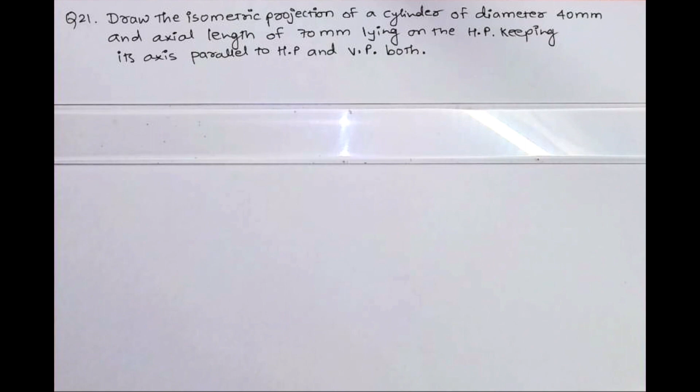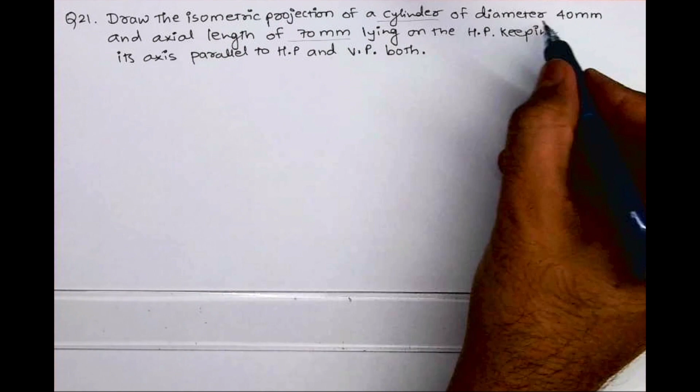Welcome to Technical Drawing. Today we'll see how to draw isometric projection of a cylinder of diameter 40 mm and axial length of 70 mm lying on HP, keeping its axis parallel to HP and VP both. Now they are saying it's a cylinder, right? Diameter 40, length 70, lying on HP, keeping its axis parallel to HP and VP both.

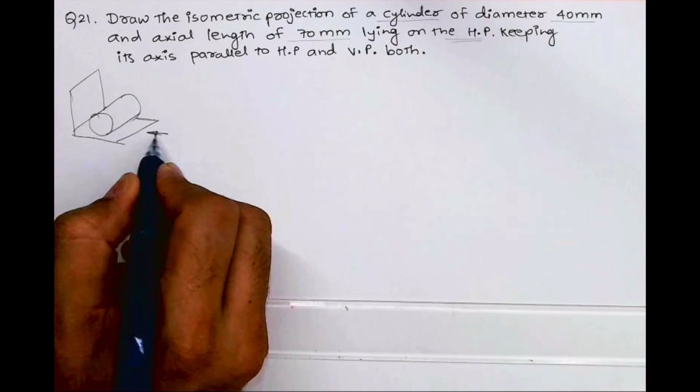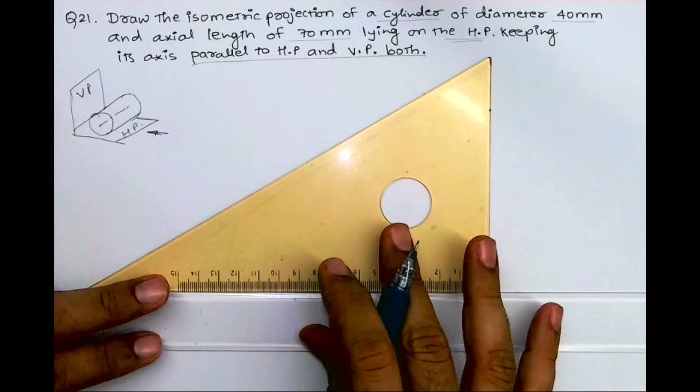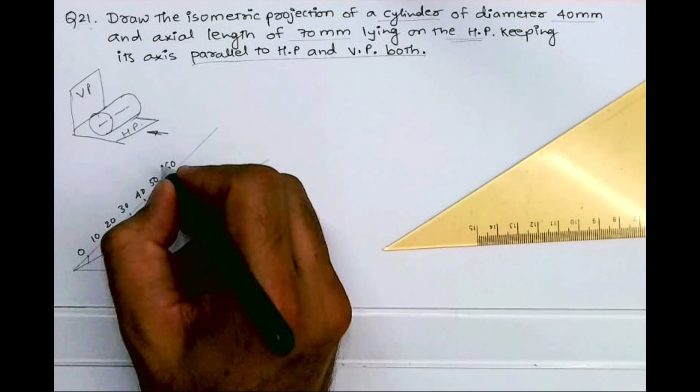So that means it is lying like this. When you see from the front, you'll see a rectangle, and in side view you will see a circle. The axis will be parallel to HP and VP, so it will be this way. So in this case, first we will draw the scale, which is 45/30. All of you know how to draw it. So we are done with the scale.

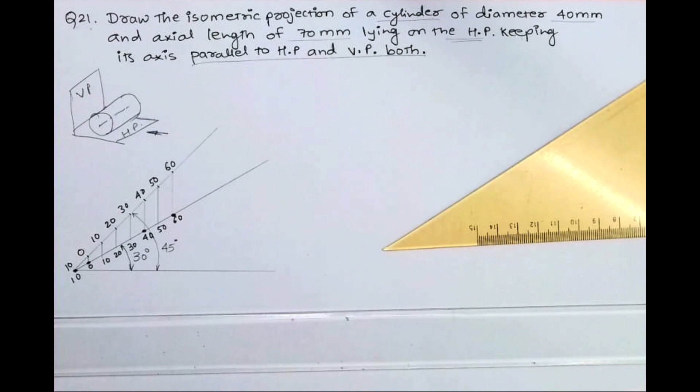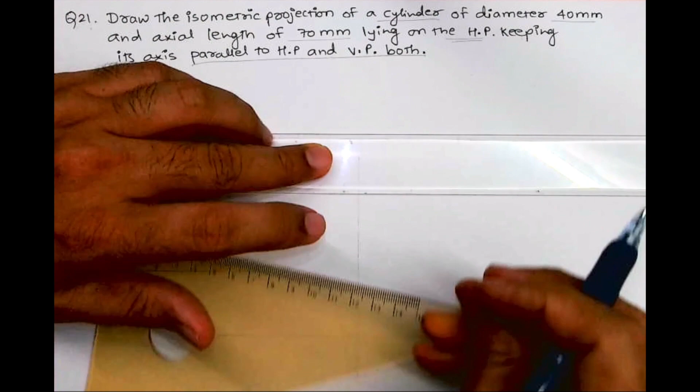Now we need to mark 40 and 70. For 70 we'll take 60 and 10 over here, so it will be 70, and for 40 we'll take 40 to 0. Now it's a circular part, so no need to draw a helping figure. If you want to draw, you can draw a circle of diameter 40. If you don't want to draw, you can start directly. See, there is a difference between circle and square. In square, at times you need to draw a helping figure, but in circle it is not required.

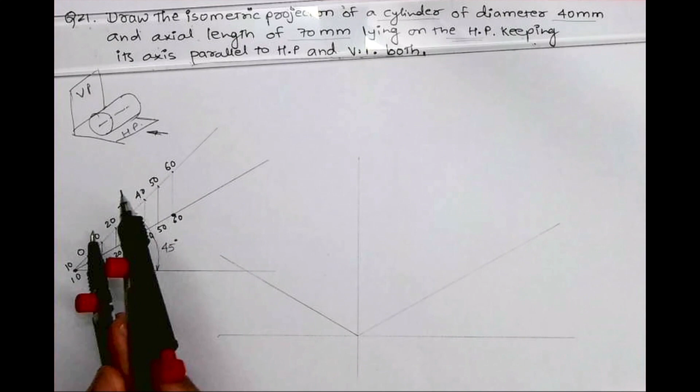So what I'm doing, I'm drawing the box. I'm taking 40 and I have marked it on both the sides. Then I will draw a rhombus. All of you know how to draw a circle in isometric by using the 4 center method, so we are doing that. Now I'll take all these points behind. How much do you have to go behind? We have to go behind by 70.

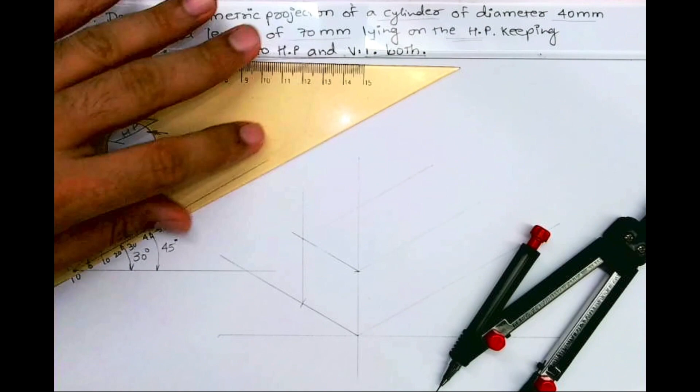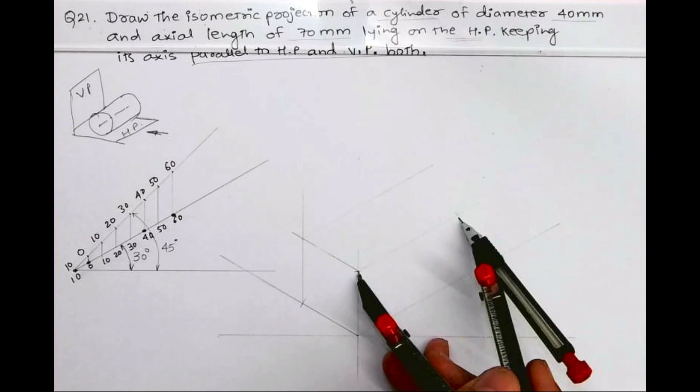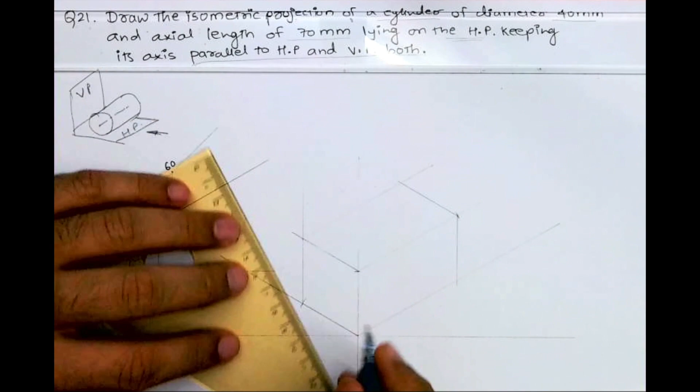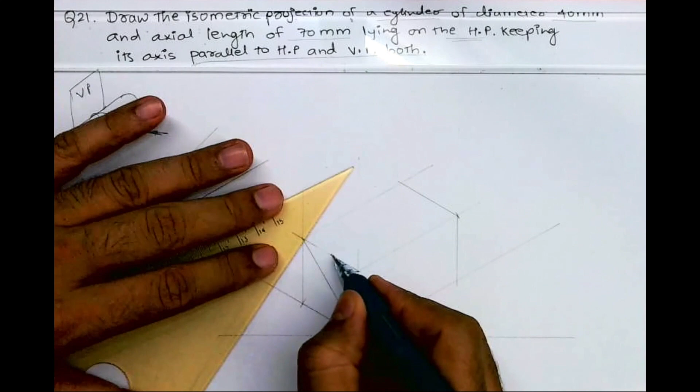So take 70 and you will cut. Then you draw a vertical line and you draw a line from here. Then you draw the longest diagonal. We'll take half of it, or you can mark 20 from the scale and mark it on it. So first you draw the longest diagonal and then you mark the midpoint. Then you join to the opposite corner like this. See, I'm taking 20 and I'm showing you it is the same.

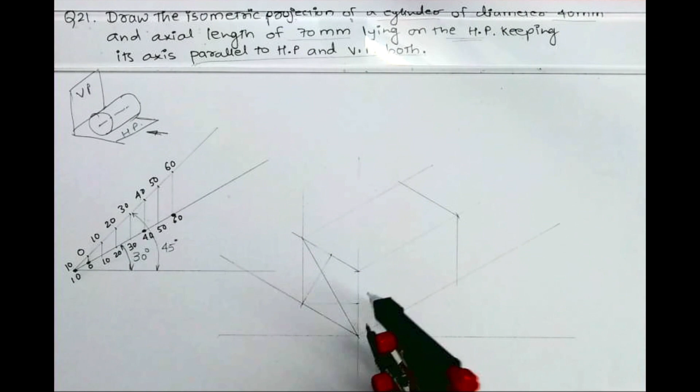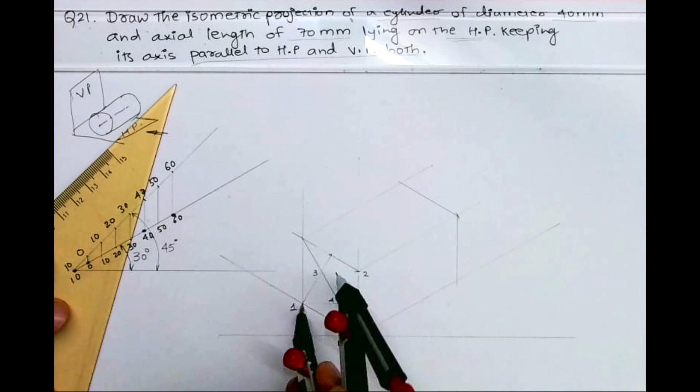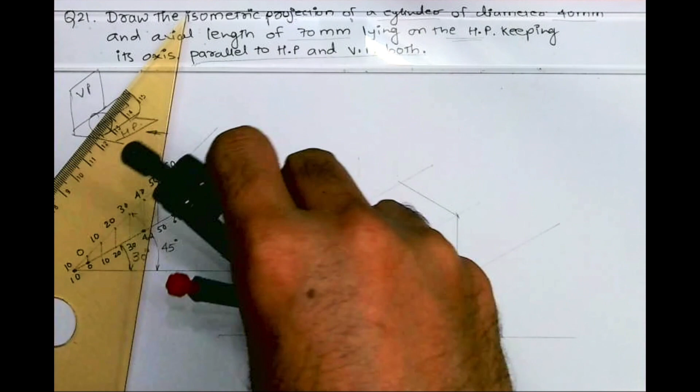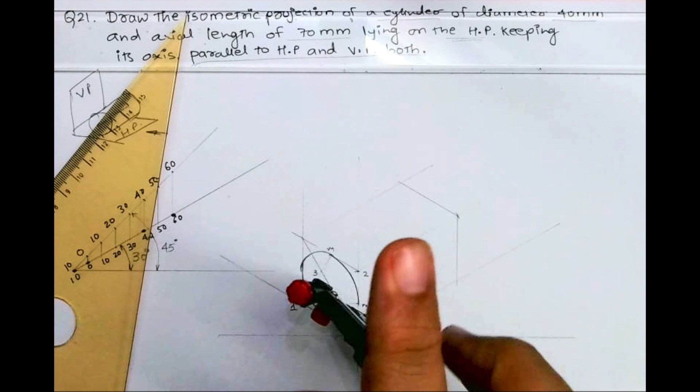This is point 1, 2, 3 and 4. So from 1 to M you take. This is M. You take 1 to M and draw an arc. Then from 2 again you draw an arc. 3 to M, again you draw an arc. And 4 to M, again you draw an arc. So this is how you will get the circle.

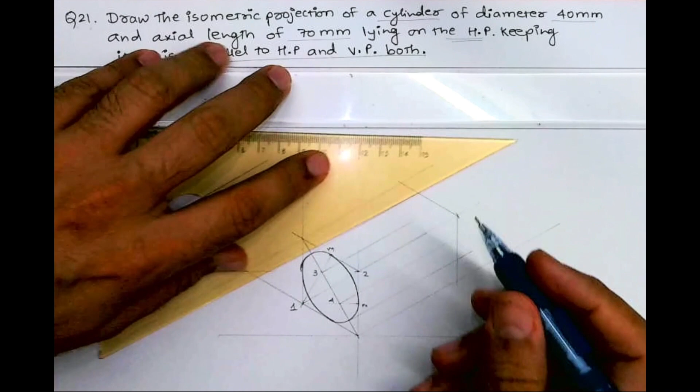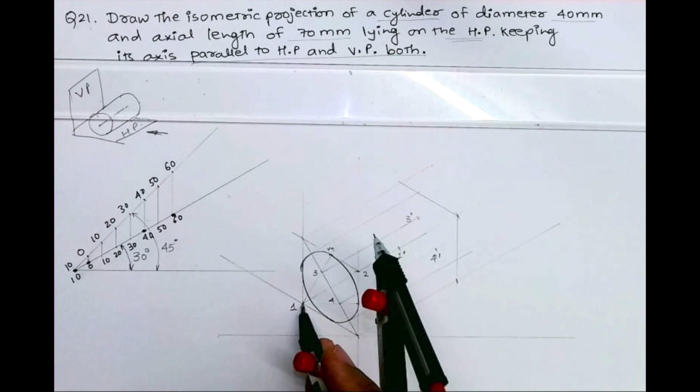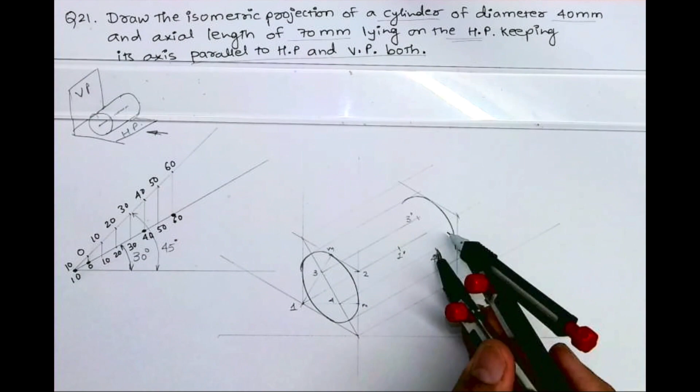Then you extend this behind. This is tangent, and then you take points 4, 1 and 3, all 3 of them behind by 70. See, we'll take 70, we'll cut from 1; this will be 1 dash, 4 dash and 3 dash. Then from 1 I will take the original radius 1 to M, and from 1 dash I will draw an arc. Same I will do with 3 to M, and I will draw an arc behind. Same with 4 dash; from 4 dash we'll draw an arc.

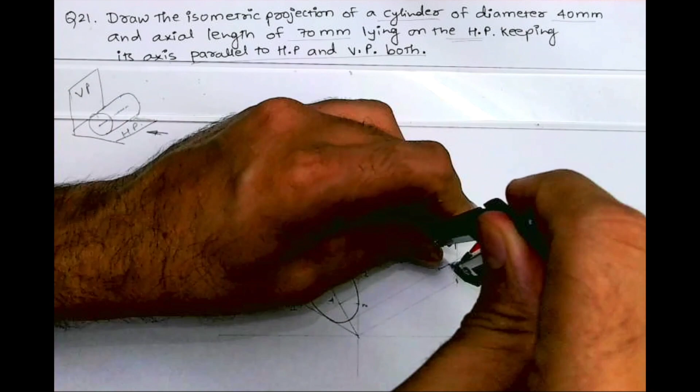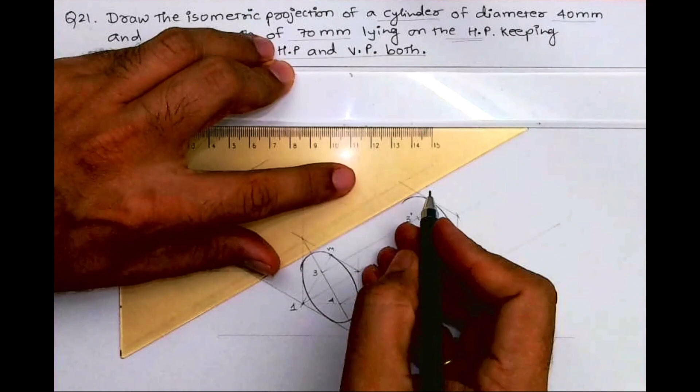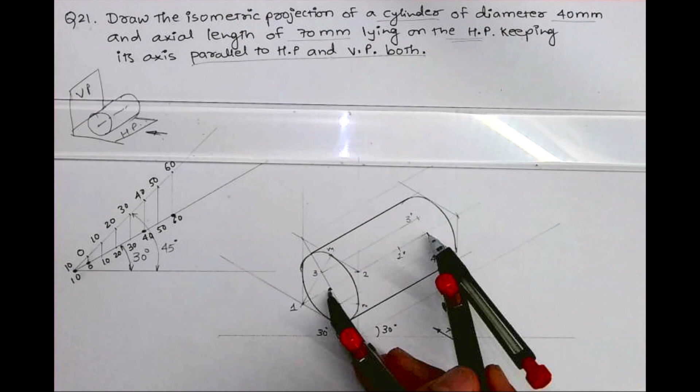After that you draw the tangent. So we are done with the isometric projection. Now this is the axis, point O. This is the center point. So we'll take the axis length and we'll cut on it. So this will be the axis, OM. You can draw that, you can do the dimensioning, and you can write isometric projection. So I hope everyone understood this sum.